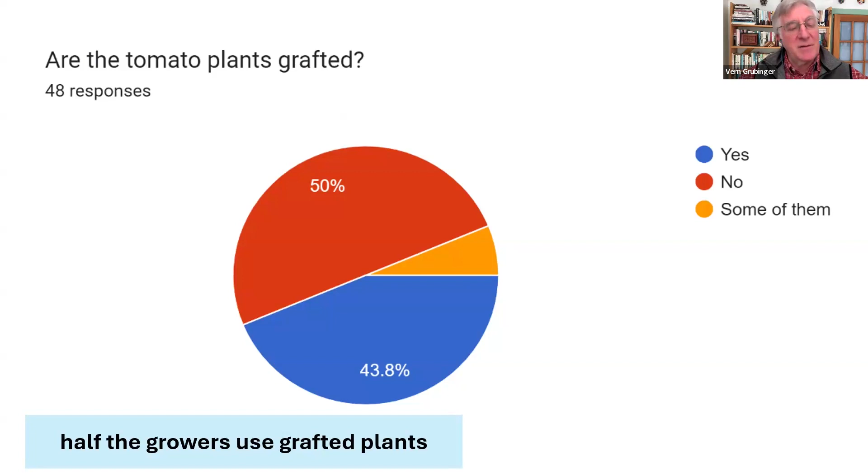About half the growers were using grafted plants. And that is something that has just been growing in popularity, both as people get their skill set down for doing it. We have some farms, small farms that's become their business, supplying other farms with grafted plants. So it's becoming easier to get them, and the benefits are becoming clearer to people too. There is a much smaller choice of rootstocks, obviously, and Maxifort is by far the dominant one. But that's changing. This DRO variety is kind of new on the scene a few years ago. It's growing in popularity.

When we asked growers what their top 3 concerns were, diseases and fertility jumped right out. There were some that were a little surprising to me, like how high pruning labor rated. So that is something to think about as related to the systems people are using and how to be more efficient there. And then there's a lot of these that overlap, where a lot of growers just said diseases, but people also called out specifically botrytis. And then you have fertility, but you have soil pH, salts. So there's some lumpers and splitters in the respondents.

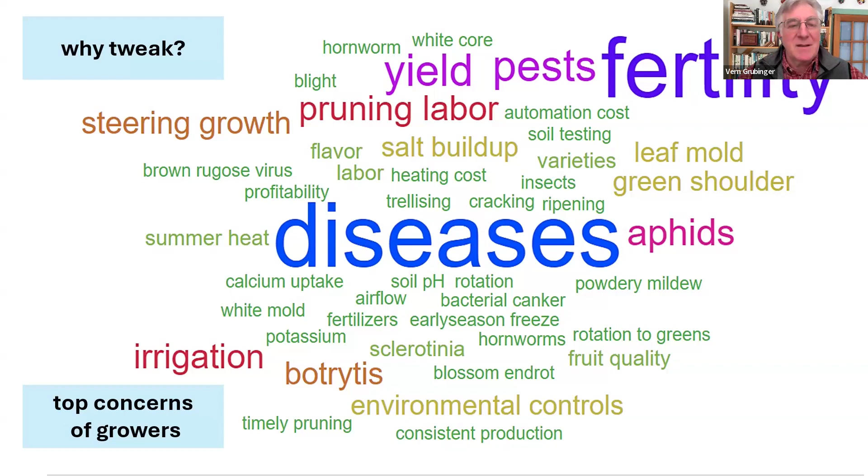So we ask growers to self-report yield and also to say whether it was actually measured or estimated. And we did help people think with the forms to count the number of boxes that they were harvesting or other methods. So the yield data is kind of sloppy, and yet it was pretty consistent. You can see how many farms are bumping around 2 pounds per square foot.

And then it becomes sort of obvious when you look at the data and information from the farms that the people with the high yields are really focused on greenhouse tomato production, tunnel tomato production. For some of those farms, that's what they do, or there's very little side crops, just the vast majority. So they're just really paying attention, and they've also made some of the investments to get the higher yields. And some of the people on the lower end, it's just not a big deal on their farm, so it doesn't get much attention. It's not a priority.

But others, they could be doing better. They're not that different in their systems from some of the higher yielders. So my focus is sort of on this: how do you move people from 1.5 pounds to 2.5 pounds? Like that's where I think the management opportunities are, not necessarily to get everybody up to 4 or 5 pounds, because again, those are more investment intensive systems.

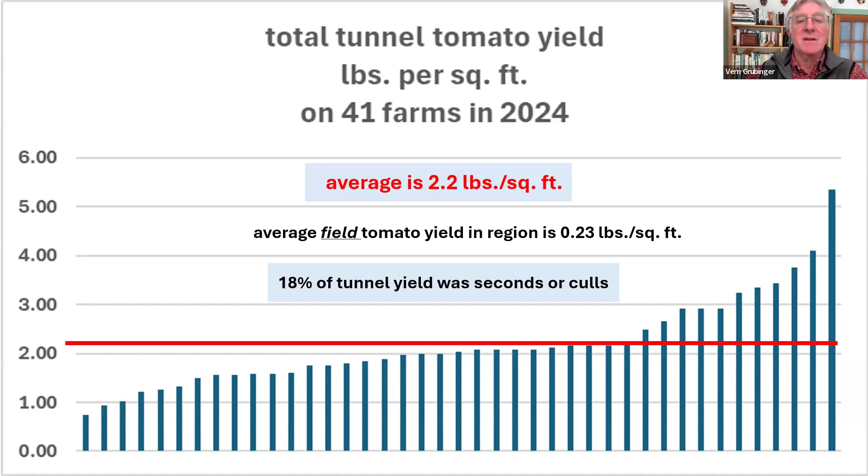So if you take that average tunnel size times that average price, it comes out to 26,000 US dollars and change. So just as a way to start to think about, when is it worth making an improvement? If you did something that was going to give you a 10% yield increase, that's $2,600. So how long would it take to pay that back?

Again, there's no algorithm for this or set specific numbers. It's going to be a bit of intuition, but again, just trying to create a framework for, is it worth putting in a ridge vent or not? How much would yield have to go up to pay that back over what period of time?

And so when we did the analysis of all of the variables I'm going to talk about that growers reported on and yield, there was no single variable that had a strong correlation with yield. It really comes down to putting together different tools in the toolbox. And this is what I'm going to show you, the difference between the high yielders and the low yielders. What are the sets of practices that people are using that seem to be related to yield?

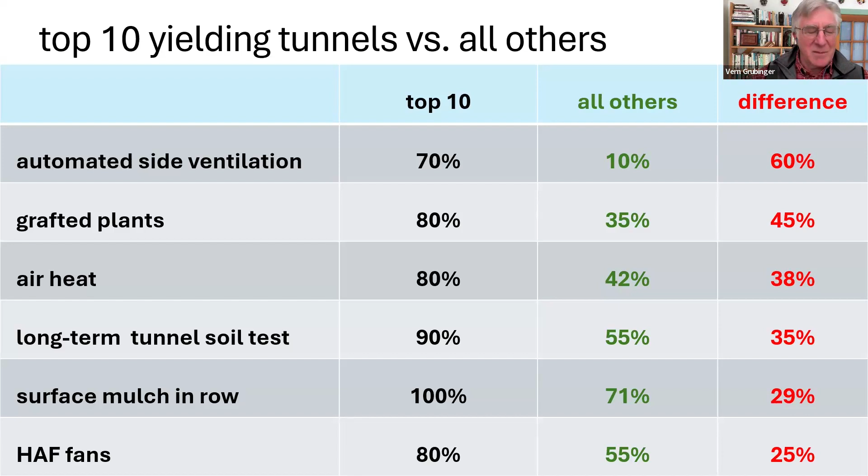And that gets more granular. We have a lot of people with fans, but they're not sufficient. They're not the right kind. They're not moving enough air. They're cheap box fans or something. So there's calculations for exactly what kind of cubic feet per minute of airflow you need.

So this is just a graph of the drip line differences. And you can see on the right, those tunnels are trying to irrigate a very wide swath. This is a little tricky to calculate because people don't have all the lines evenly spaced across the house, right? They're clustered in the beds. So I just took the average, the number of lines divided by the width of the house. But you can see that 2 feet is a lot of width to try and get water to move laterally.

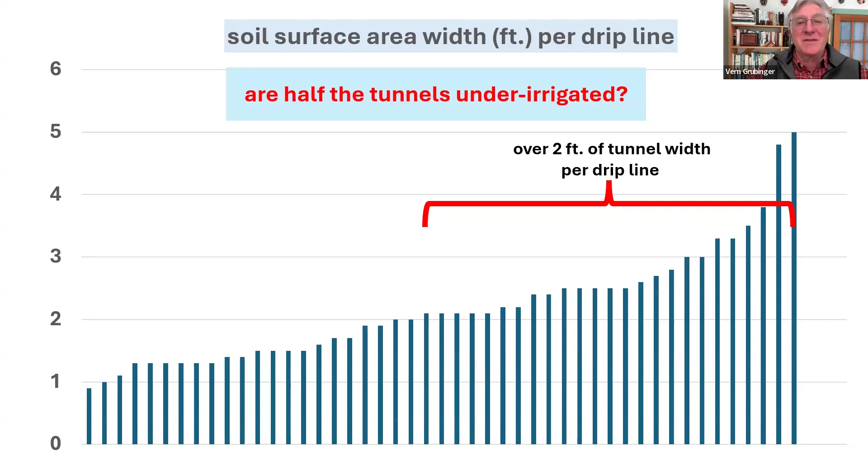So how much ventilation should one have? My personal experience and my colleagues, we go into these tunnels and they're hot, they're humid, especially when the canopies are large later in the season and in non-windy locations. They're big plastic bags with a few holes in them essentially, right? So especially when the holes are not up high and the warm, dirty air can't get out, they feel like they need more ventilation.

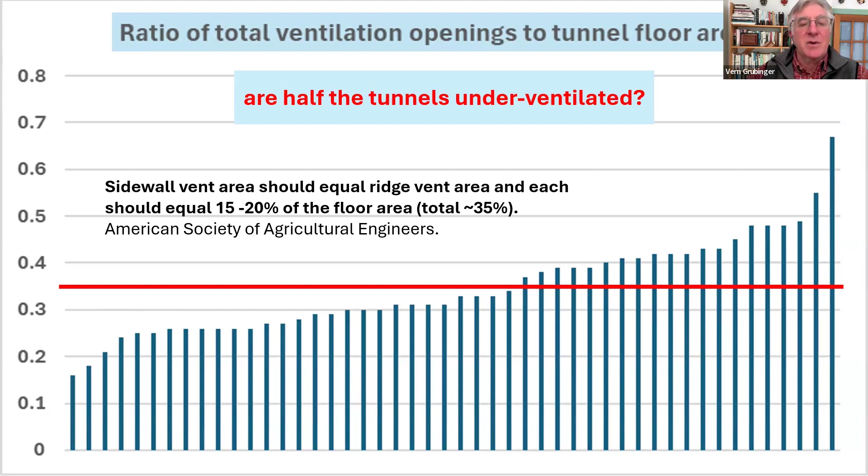We have growers who've cut everything above the door from wall to wall and have a giant hinged flap that usually goes in so the wind won't catch it. And it's on pulleys and ropes with cleats. And they just open that whole thing up and let the air out. And we have these small ones, which are better than nothing, but love to see that at least 2 or 3 times the size there so it can really let the air out.

And then the ridge vent is kind of the Cadillac in terms of physics, just opening all the way across the top that lets all the dirty air out. Growers tend to love or hate these things. It's no fun getting up there and changing the plastic because you're going to end up putting on 2 sheets instead of 1, and you've got to be up on the ridge making that happen. Some growers leave boards on the cross braces to get up there, which blocks some light. It's probably not super helpful. It's not a lot of light loss, but so there's that.

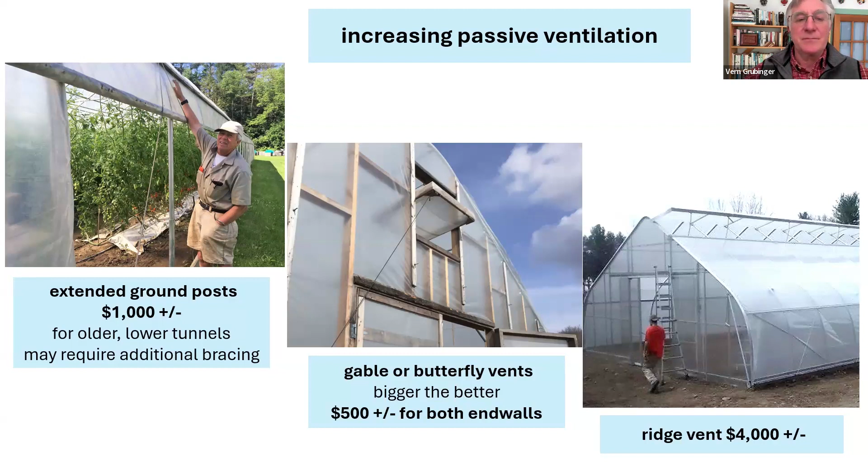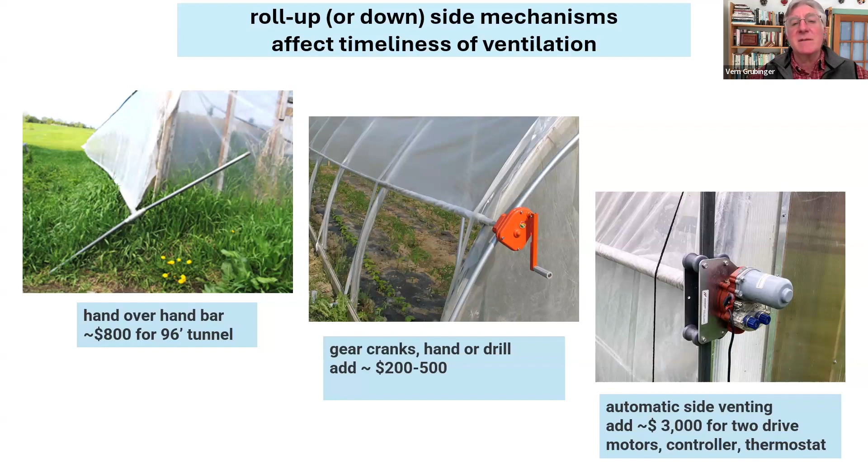I talked about these labor-intensive systems for the roll-up sides, and certainly everybody should be moving away from the one at the left. Just dangerous. Crank systems are popular, but these automatic venting systems, there's a pretty wide range of pricing, and you need a controller to drive them. But they're pretty reliable and getting to be increasingly popular. Advancing Alternatives is one brand people are using that seems to be popular.

So keep in mind there's ventilation and there's circulation, and they're not the same. Having good circulation can help with ventilation because the air is moving, might be more likely to find its way out of an exit that the physics of heat rising is driving. But largely this mixing is to keep the temperature, humidity, and CO2 gradients uniform in the house. And I already talked about the CO2 micro gradient. It may not even be top to bottom. It's just actually around the leaf. You're trying to mix that up, but certainly the temperature and humidity gradients are probably more at the macro level.

And when this is working right, what I look for is to see, is the majority of the leaves just trembling slightly. And that gets harder to achieve as the canopy gets larger. But the placement of these fans is really important. There's plenty of data out there of where to put them. You're basically trying to have a big swirling circle of air, and air is heavy to move. So one fan is pushing, and then the other fan at the other end catches the air as it bounces off that back wall. So that one is actually closer to the wall than one in the middle.

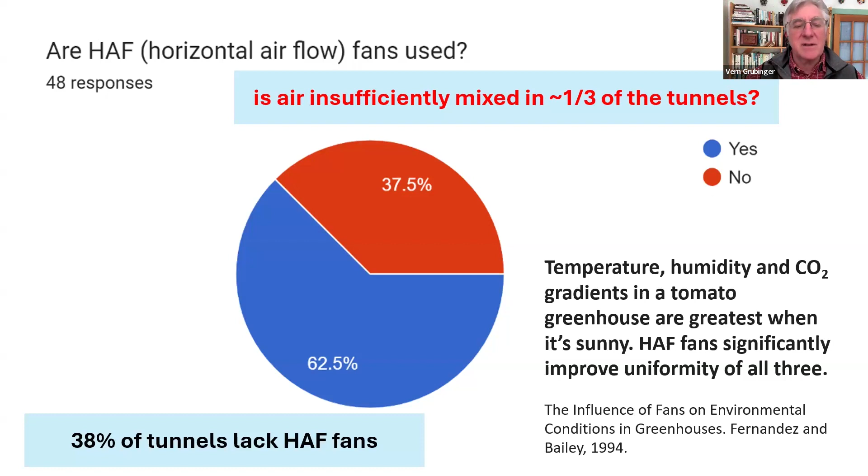It depends how long your house is, but most of our 100-foot houses are having 2 fans. And you got a slide there. Yep. And there's calculations. So Chris Callahan, who's an amazing ag engineer on our team, has a great blog site with all kinds of stuff on tunnels and post-harvest storage, but has done a nice post on circulation and ventilation.

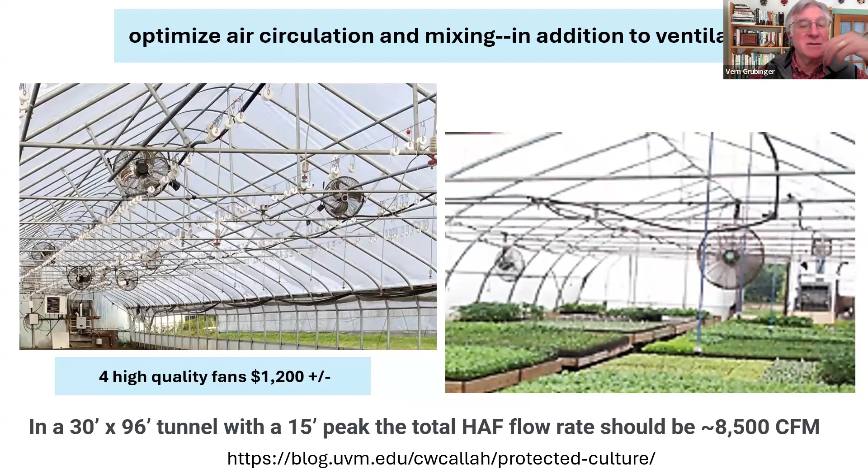And you can determine how many cubic feet per minute your fan is moving, and the combination of them should total 8,500 in a tunnel that size, a 15-foot peak. And these high quality, slightly more expensive fans also use less electricity in the end. So it's worth making that investment.

Yeah, so there's just always this dance you're doing. From a disease management perspective, foliar disease, you'd love to have really widely spaced plants at a very low density so the leaves can all dry off and air circulates well, even when the canopy is full. From a yield perspective, you'd like to tighten it up. So there's no right answer.

Some of it is which cultivars are you growing? What's been your history with diseases? Do you have something where you can spray and get management from a fungicide or bactericide or not? So you kind of got to piece it all together. So we've had growers go both ways, especially people growing more heirlooms and things that get a lot of leaf mold, backing off the density, giving more space, helping them dry out more.

And then others with more standard greenhouse tomato varieties that realize, oh, I really should get down to closer to 4 square feet per plant, and have seen their yields go up. And especially the early yields, if you're really after that, the higher density makes sense.

So there's no right answer to this, but I would say the people down at 2 square feet per plant are asking for trouble disease-wise, and the people up at 8, 9, 10, there's something else going on. Usually in that house there's customers in there, or they've set up beds for a different crop. It's not really suited for tomatoes, but you can see most people are in that 4 to 6 feet.

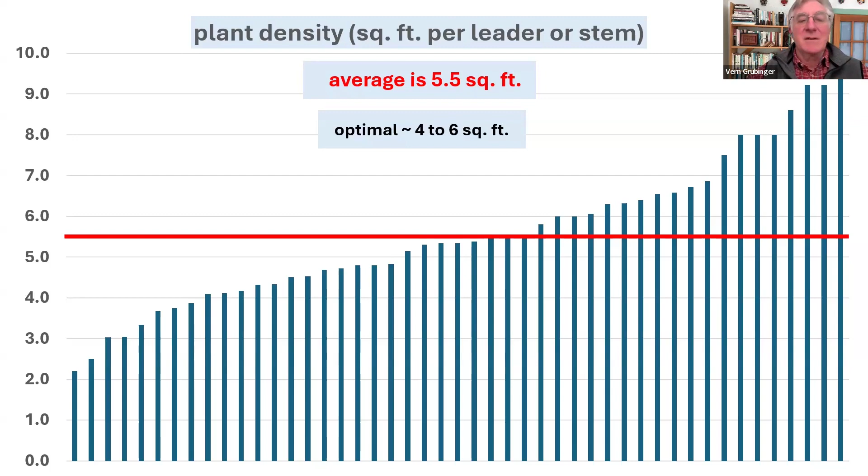But the range of temperature you want to be in for optimal plant growth is 70 to 75. I'm not trying to cook them by going higher than that. And they're kind of going to sit there if it's below 60. So that's a whole other consideration of when do you want to start these tunnels.

And most of our growers are starting when the soils are still cold. So 2/3 of them have set plants before early May. And certainly those people putting them out in March all have bottom heat, because it wouldn't make any sense at all. And you could see they would just literally sit there and do nothing.

But I would say that late April to first week of May, you're on the edge of whether a root zone system makes sense, because it's such a short period of time before the soils will start warming. And also some people are using plastics to help warm the soil. And just keep in mind, black plastic not laid tight to the soil does not heat the soil. It transmits heat physically from the hot plastic to the soil by contact. A loose plastic mulch will actually keep the soil cooler.

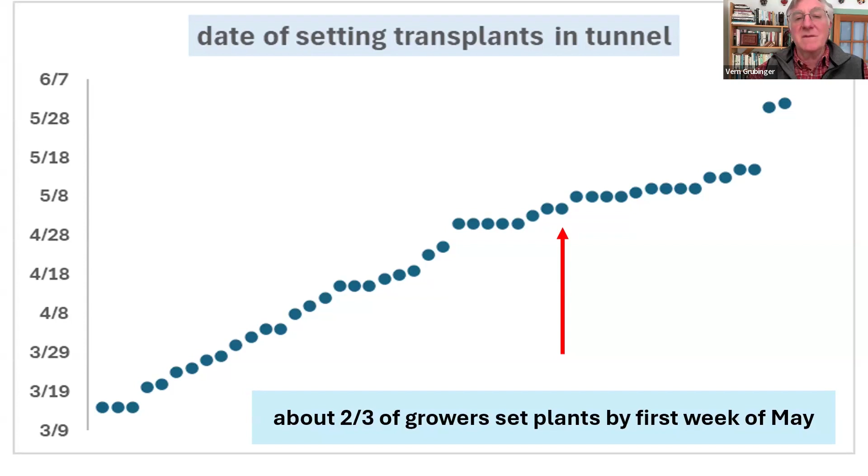So if you're going to use black to try and heat it, it's got to be on a smooth surface, laid really tight. Clear plastic obviously is a greenhouse effect and doesn't need to be tight. It'll heat it that way. So if you're not sure, just stick your hand under the plastic and see what the temperature is. And certainly any organic materials, straw, etc., will keep the soil cooler. So you wouldn't want to put that on until it's already thoroughly warmed.

So is ground heat worth it? Very few of our growers in this survey were using it. I was actually surprised because it's not that complicated of a system to put in, and you saw so many of them are going into the ground pretty early in the season. And the data has been out there.

There are some super fancy systems on the right, bigger houses with all these different zones and usually outdoor boilers and stuff. But most of our smaller growers just have domestic hot water heaters from whatever you're using, electric, propane, oil. And the designs have been out there for 40 years of how to design the loop so the water doesn't get too cold too fast, and the heat is distributed evenly, and how deep to place them and all that kind of stuff. I'd say the $1 is dreaming at this point. It's probably $2 or $3 a square foot realistically.

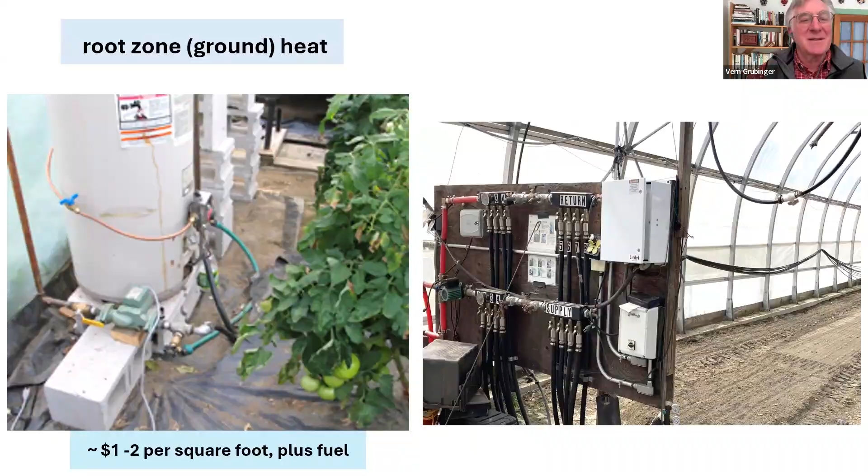And keeping the heat in the ground, the heat you already have, makes a lot of sense. So more and more growers have been using perimeter insulation, pink board, blue board, something down as deep as makes sense to go. 1 foot anyway, 18 inches, 2 feet. You don't want to destabilize your ground posts anyway. So that's a consideration. If you're not down 3-4 feet into the ground, you probably shouldn't be loosening up soil around those posts. We do have growers sometimes that have gone out at an angle to try and mitigate that loosening.

But yeah, I did a study where we measured yield in all the different, there were 6 beds in a 30, I can't remember exactly the width of the tunnel, but the outer 2 beds, the yields were a third less than the inner 4. And so there's a bunch of factors going into that. Some of them is this grower was backing in a manure spreader and spreading the compost. So I'm sure there was a higher density of nutrients in the middle. Just the TLC, that it's harder to work on the outside rows, so they don't get the attention in the middle. But a big factor is also temperature.

And we see this every year when there's early chilling injury or frost injury to tomatoes and tunnels. It's always the outside, obviously, where you see it first, just colder, and also you see the plants are shorter. So this is something to consider, pretty low cost if you don't have it.

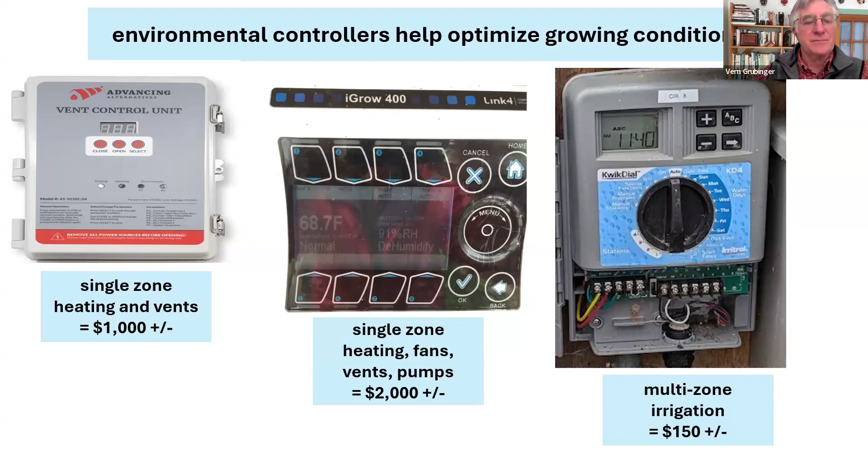CO2 is not something most of our growers are adding to their tunnels. We have a few, and you can get these CO2 generators on propane for a couple $1,000. Certainly the benefit is more profound when the houses are closed and CO2 you add stays in there and isn't lost with ventilation. But up in Quebec, they were blowing it in pretty much all the time. So it's hard to know what the benefit is.

Those houses where they were doing it were these more triple bay gutter connected. So there's a big volume of air and plants in the middle that is not as highly ventilated as some of these narrower, longer tunnels. And of course the cost of the CO2, but obviously with the yield increasing, when you double the CO2 to 1,000 ppm, or the growth doubling, it's something to think about. But the first step is just to have a good mixing with the horizontal airflow fans to be able to utilize all the CO2 that you already have.

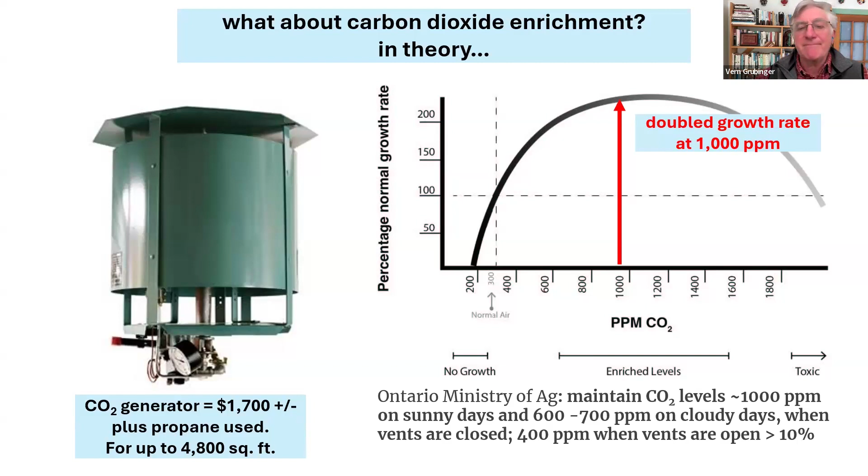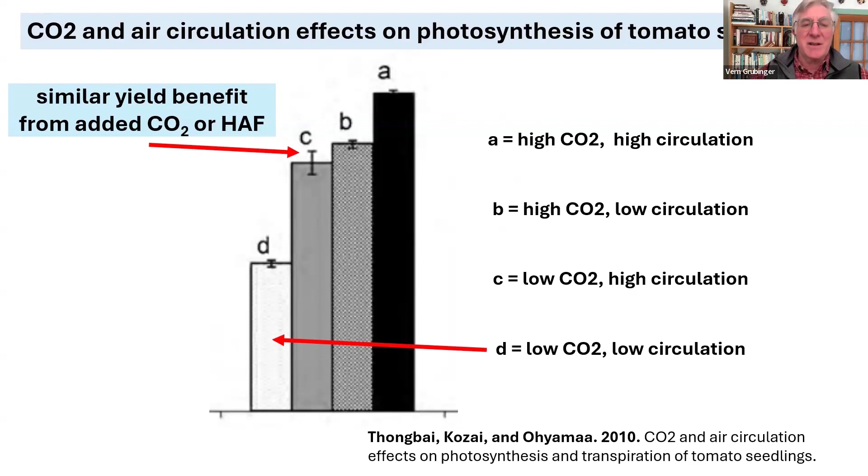And wrapping up here, talking about IPM, I see you've got a webinar coming up on that. I was kind of surprised that a third of the growers don't use biocontrols. Our entomology lab has been a leader in promoting the use of banker plants, the use of what they call habitat plants too, which Alyssum is a popular one where you're providing nectar and pollen and a place to hang out, and also places for the

prey for the predators. And so just having a few of these plants in the end rows, they're also using beans to monitor for thrips and marigolds. And so there's a lot of simple information you can get from having a small number of these plants in your tunnels. So I definitely would recommend looking into that. The UVM entomology lab does have some good info online.

We have, and you can see Aphidius is the most popular. We obviously have a lot of aphid problems like anywhere. Aphidius, Aphidoletes, people are buying lady beetles and putting them out there for hotspots. And Encarsia is common for whiteflies. So I don't know what your suppliers are like up there, but we've got a few good ones down here. IPM Labs in New York State is where a lot of people go for their advice and beneficials.

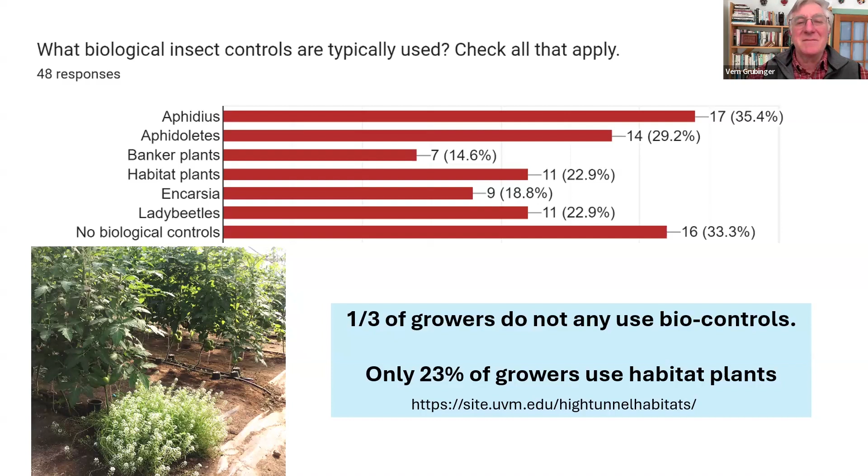And a bit of an aside, we have hardly any growers that have these harvest tools, gantries or harvest carts suspended, and a few that do like them a lot. And I was talking to Rimol, one of our greenhouse suppliers, saying they used to be more popular, and for some reason fallen out of fashion. I don't know if it's the people wanting high density plantings.

So I mentioned this long-term high tunnel soil test, and I think another piece of that is a lot of our organic growers are front loading with something that will release slowly. Seed meal, soybean, peanut, feather meal, some kind of mixture, blood meal, who knows, all kinds of things. Mostly it's potassium sulfate fines, and the fines are really important. The small particles; the big particles tend not to dissolve in the tunnel.

And the UMaine lab was reporting seeing the particles in their soil test samples coming, like it's not the same as outside. So once you have the fines and Chilean nitrate, which I don't know if you're allowed to use organically up there, but that's what people are fertigating with, and typically using tissue tests, leaf analysis, to identify the need for P and K during the season.